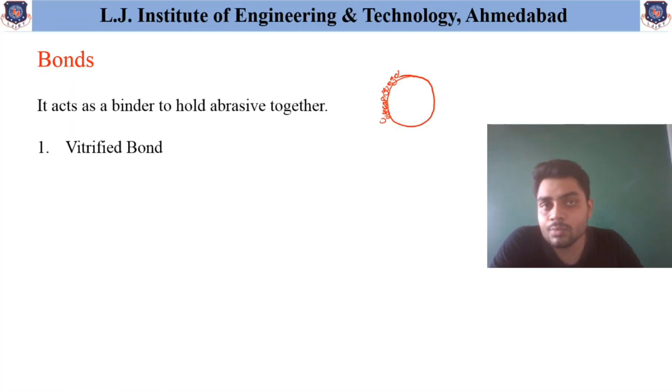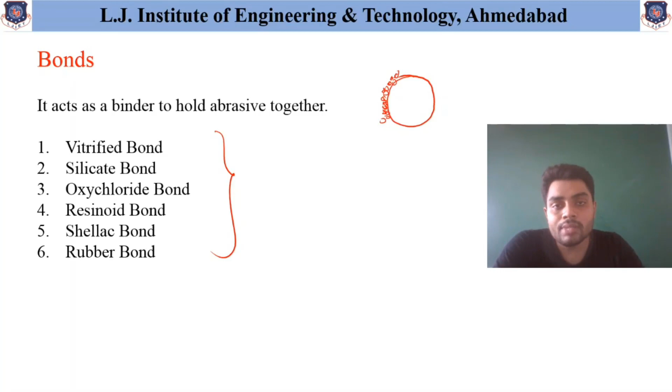There are many different types of bonds available: first is vitrified bond, second is silicate bond, third is oxychloride bond, fourth is resinoid bond, fifth is shellac bond, and sixth is rubber bond. These are the different types of bonds used for manufacturing grinding wheels. We will discuss all these types one by one in detail, starting with vitrified bond.

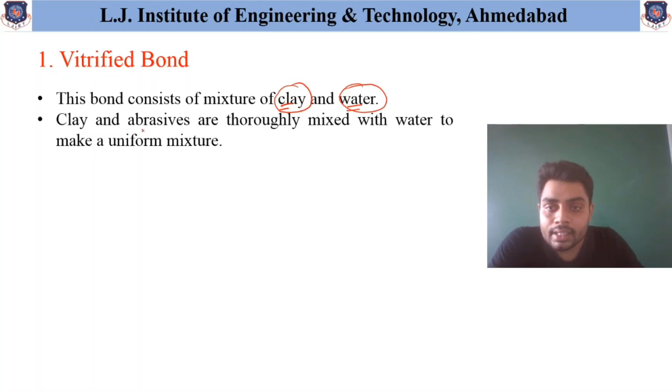So first of all, how is this vitrified bond formed? This bond consists of a mixture of clay and water. Clay and abrasives are thoroughly mixed with water to make a uniform mixture. When this mixture is obtained, it is molded to the shape of a grinding wheel and then dried up to a certain point to take it out from the mold.

That means when this mixture is molded into the shape of a grinding wheel, it is given time to dry up, and when it has dried, it is taken out from the mold. Then this perfectly shaped wheel is heated just like brick making. After drying, the important step is to heat up the grinding wheel, which results in the strength obtained by combining all the abrasive particles.

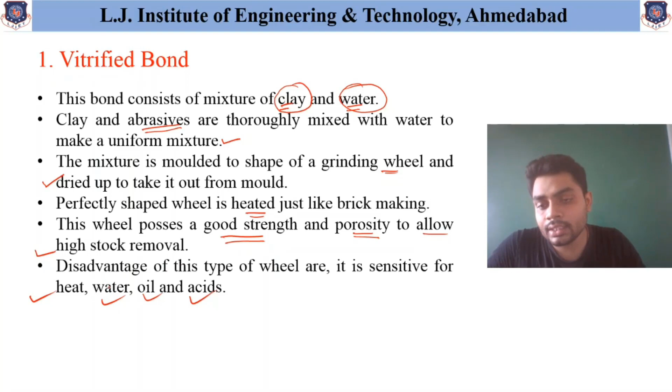The wheel obtained using vitrified bond possesses good strength and porosity to allow high stock removal, meaning it is useful for removing a larger amount of material from the workpiece. There are some disadvantages too. The major disadvantage is that it is sensitive to heat, water, oil and acid. If the wheel comes into contact with water, oil or acid, or a higher temperature environment, its performance may deteriorate. Its impact and bending strength are also very low.

In specification, as we discussed in our previous lecture, vitrified bond is indicated as V. So if V is indicated in the bond section of the specification, we understand that vitrified bond is used in that grinding wheel. This is the basic detail about vitrified bond.

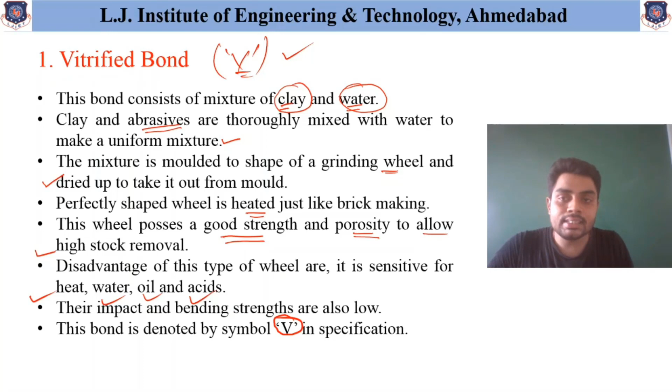The second one is the silicate bond. Silicate bonds are made by mixing abrasive particles with silicate and soda, or water glass. By using this combination, silicate bonds are formed. After mixing all the materials required to form this bond, it is molded into the required shape, allowed to dry, and when it dries, it is taken out from the mold.

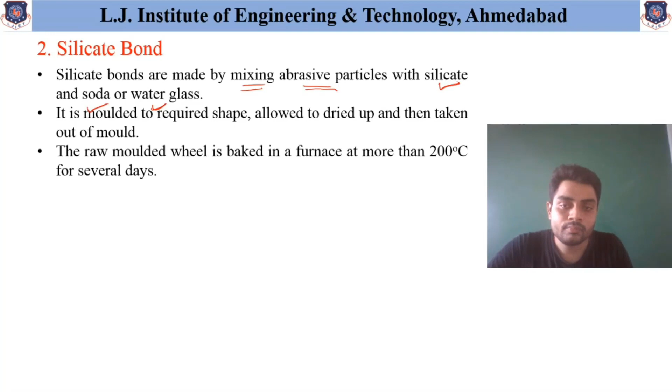The raw molded wheel is baked in a furnace at more than 200 degrees Celsius for several days, because in this silicate bond, water content and other particles are present during mixing. So drying is necessary for proper use of a grinding wheel with silicate bond, and for this purpose it is baked in a furnace at more than 200 degrees Celsius for several days.

This wheel exhibits waterproofing properties, so it can be used with coolant. When a grinding wheel has silicate bond, the supply of coolant is feasible, and it helps to maintain the surface finish.

And in grinding wheel specification, this silicate bond is indicated by the letter S.

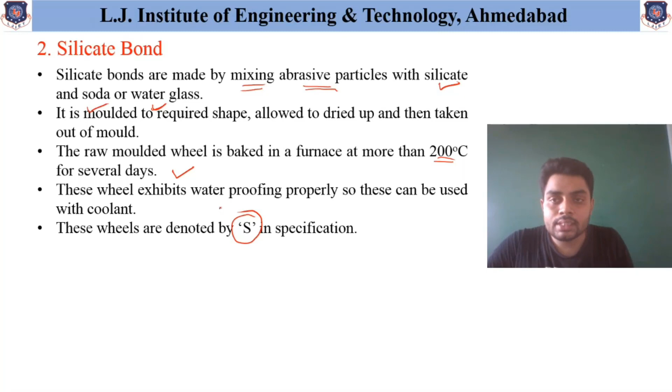So the next important bond is the oxychloride bond. In this bond, proper mixing of abrasive with oxide and chlorides of magnesium is required, because these bonds are formed easily by mixing the abrasives with the oxide and the main important material, the chloride of magnesium, which helps to form this oxychloride bond. Then the next step is common: it is molded and baked in the furnace to give the shape of a grinding wheel.

These grinding wheels are used for disc grinding operation. So when a grinding wheel has an oxychloride bond, it may be useful for disc grinding operation. And in the specification of the grinding wheel, this oxychloride bond is indicated by the letter O.

So again, if we summarize the first three bonds, the vitrified bond is indicated by the letter V, the silicate bond by the letter S, and the oxychloride bond by the letter O. These are the main important parameters of these three bonds.

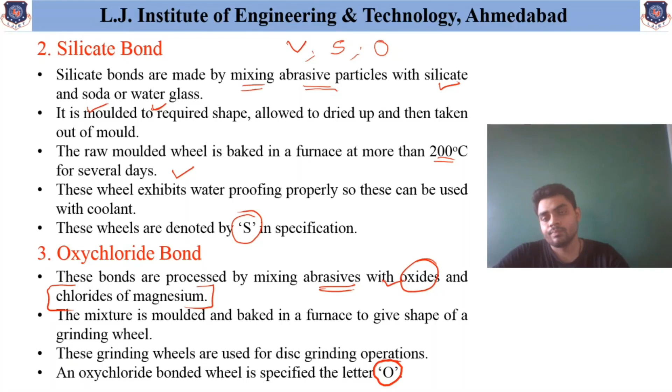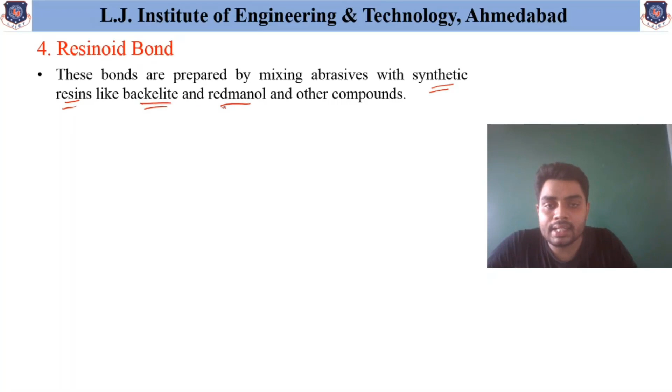The next, fourth bond is the resinoid bond. This resinoid bond is prepared by mixing abrasive with synthetic resin, such as bakelite and redmanol, and other compounds are also used to obtain the required properties. The second step is mostly common in all types of bond: after mixing all the required materials, the mixture is molded to the required shape and baked up to 200 degrees Celsius to give a perfect grinding wheel.

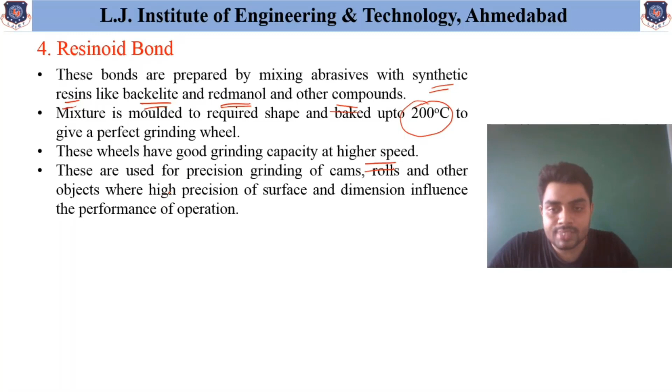These wheels have good grinding capacity at higher speed. That means when the grinding wheel is required at very high speed, this resinoid bond is helpful. They are used for precision grinding of cams, rolls and other objects where precision of surface and dimensional influence on performance is important.

So based on the requirement of high precision, this resinoid bond is used for bonding the abrasive particles in the grinding wheel. And this resinoid bond is denoted by the letter B in the specification of the grinding wheel.

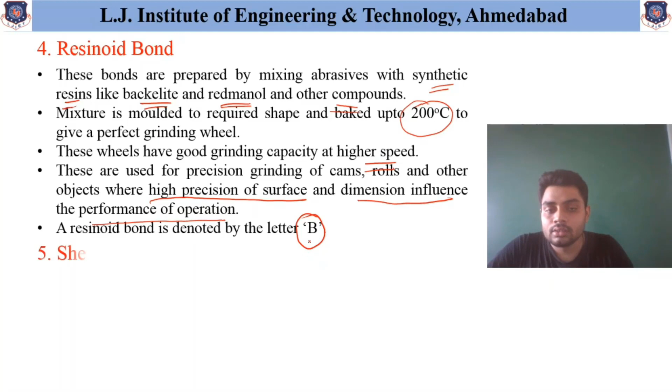Now the next one is the shellac bond. This shellac bond is prepared by mixing abrasive with shellac, and then it is molded by rolling. So in this particular bond, the molding is obtained by rolling operation.

Grinding wheels having shellac bond are recommended for cool cutting on hardened steel and on thin sections. It is also useful for finishing chilled iron, cast iron, steel rolls, hardened steels, cams and aluminium pistons. And this shellac bond is denoted by E in the specification of the grinding wheel.

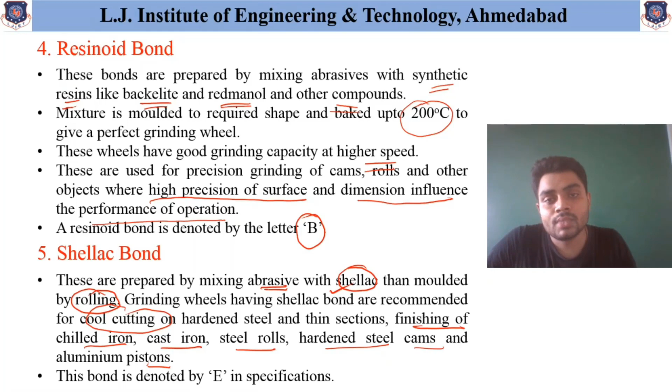So up to now we have discussed the main important bonds used for grinding cutters. If we summarize all these types of bonds and their characteristics, first is the vitrified bond, which has good strength and high porosity. The designation is shown here for all the different types of bond.

Similarly, the silicate bond is useful if the operation requires waterproof work, it is used for large diameter wheels, and for grinding fine edge tools. The shellac bond is useful for thin wheels and high elasticity, and it is not suitable for heavy duty application, so it is avoided in heavy duty work.

The resinoid bond is useful for rough grinding and high speed grinding. The rubber bond is often used for thin wheels, for fine finishing and polishing. And the oxychloride bond is used mostly for disc grinding operation, when the material is less brittle.

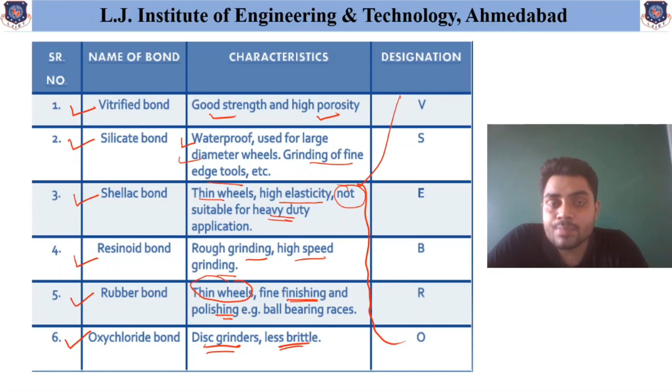So in this lecture we have summarized the different types of bonds used in grinding cutters. I hope it is clear to you where these specific types of bonds are useful and where they are required for a specific application.